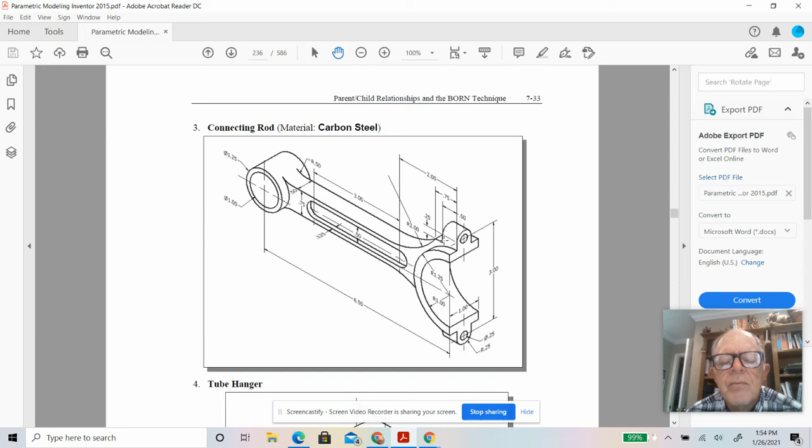So that's where I got the dimensions. It's all there. I want to show you the mirror command.

So once we have it done on the top here, we don't want to do all the work to get it in the bottom. It's easy, I'll show you how easy it is. You click mirror, it tells you what to do: select the mirror line. So the very first line I drew on this was this line right here.

Then I offset it up 3/8 of an inch, and offset it down 3/8 of an inch. Then I turned it into a construction line with that. I don't want that part of my extrusion, but I'm going to use it. Okay, so select a mirror line - that's my mirror line.

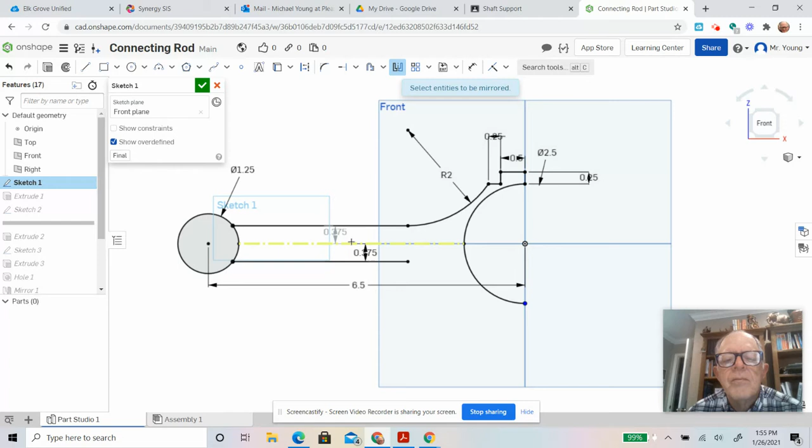Now select entities to be mirrored. I can click that one. Boom, look how easy that is. Boom, boom, sound effects are mandatory. Boom, boom, bingo, got a region. That beats putting all this stuff in again.

Now, the way I got this curve, it tells us what the radius is. I drew a 4-inch circle out here, made it tangent, made it coincident at that point, and then trimmed it.

All right, so we've had this problem before down here. I forget what that radius is - it's a 1/2 inch. So that's a fillet.

And we click here, and we click here, and it does not like that. You have to, first of all, trim this. No, that's the wrong one. Control Z, trim this. But I gotta go back to this - trim.

Now I can fillet it. Of course, if you did this first, you could have gone ahead and mirrored the fillet as well. The radius was - did I say 0.5?

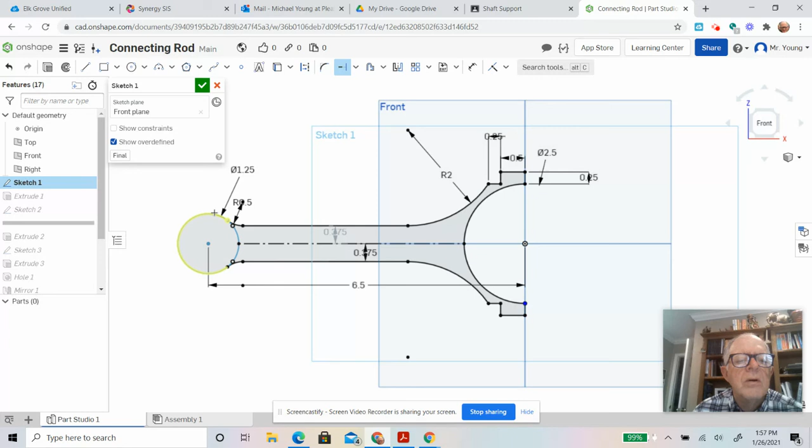So I'm going to extend this circle. Grab that circle and just bring it around here. So I put it back in. Now I can trim the back half of this, and that's what it's supposed to look like.

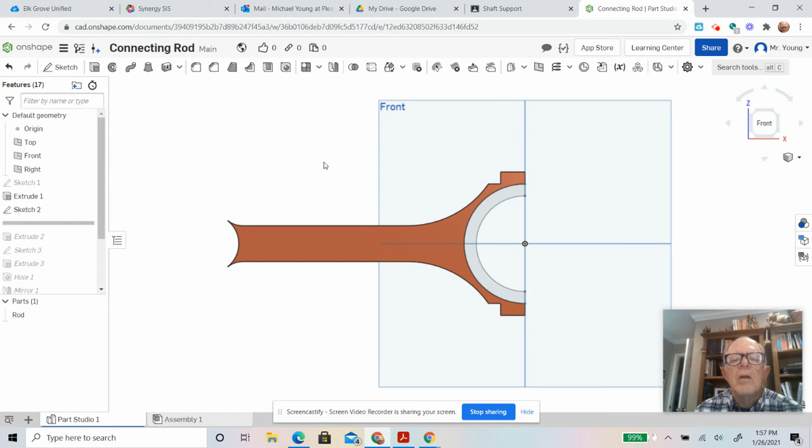Then I extrude it. Then I made that sketch, extruded that. Okay, now I put the little top on there. Then I put a hole in there.

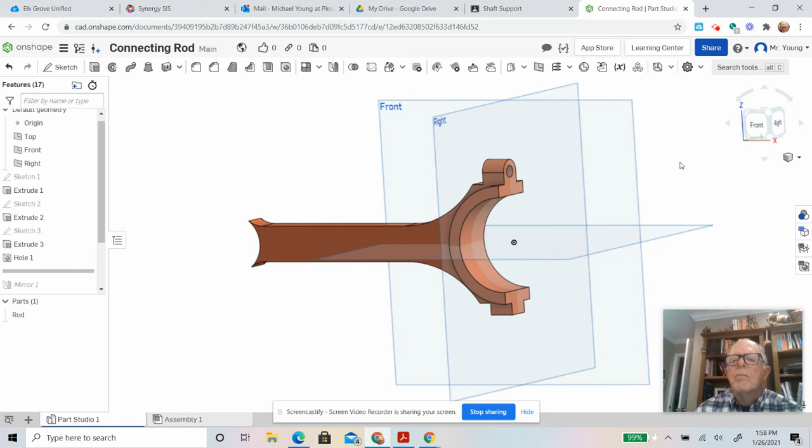Now I want the same thing down here. But that's a 3D mirror, and click here.

And I was having real trouble with this until I realized that this whole thing is a part - it wouldn't let me pick individual pieces of this. You've got to pull this down; we want to mirror features. Everything in here, this extrude is a feature, that's a feature, that's a feature. The hole is a feature.

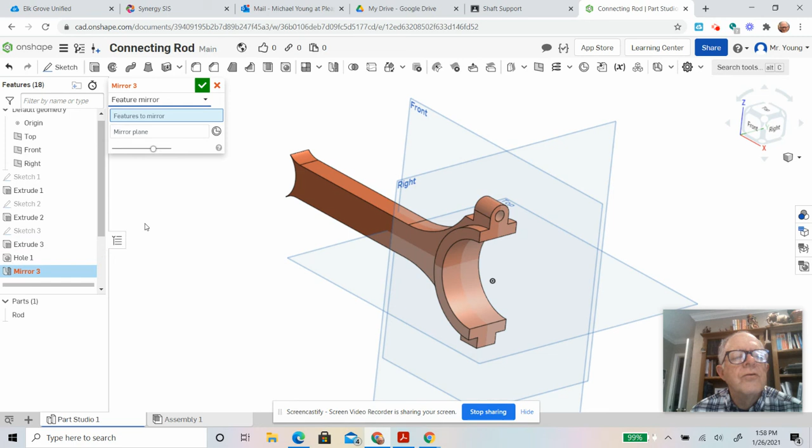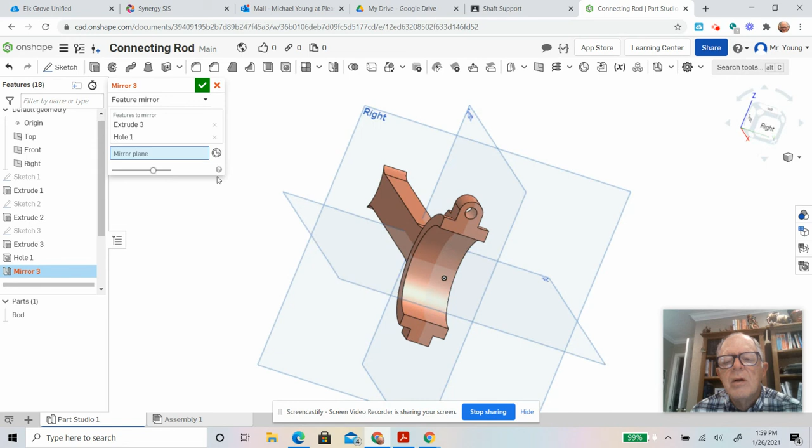So I can pick the features off of this - I want this extrusion, and I want this hole. I pick the mirror plane, and the mirror plane is the one right in the middle, right there. It's the top plane. So again, another key reason for keeping things centered. There it is.

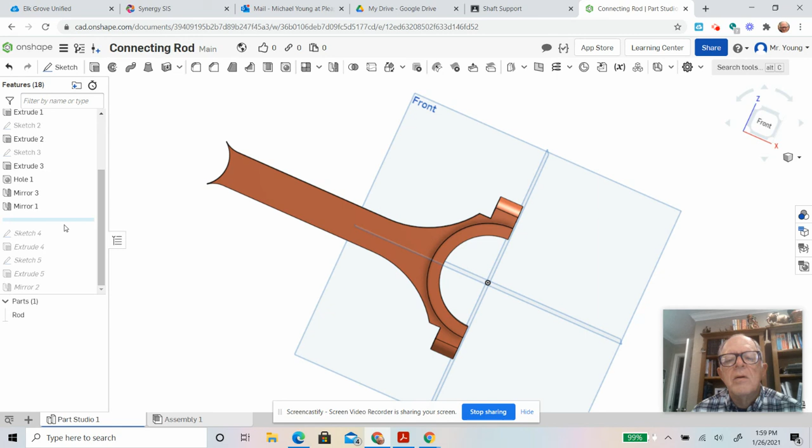What's that? I think that's something I don't need anymore. Okay, so then I put that on.

That's pretty easy. Now, when I did this, it didn't match up with this - it was because I had a radius wrong. I had to go back in and fix it. It should match. The distance says 6.5.

Okay, now I want to get rid of that. So that's really not too difficult - we know how to draw that, and we know how to extrude it.

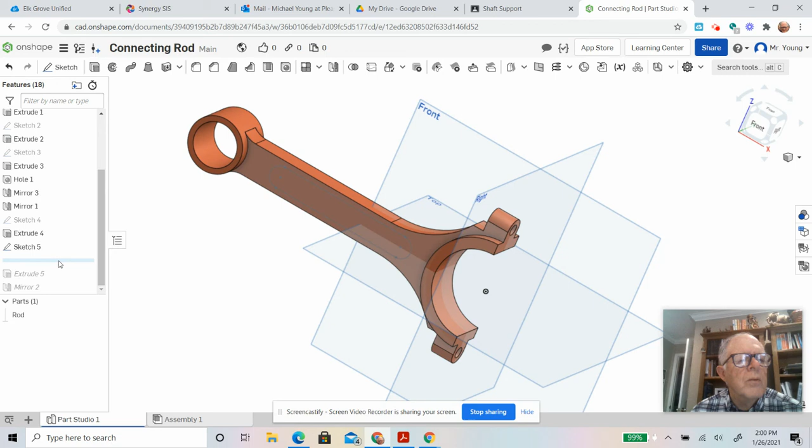But we want the same thing on the back side. So again, the front plane is right in the middle of this thing. That's the beauty of choosing the origin and getting things lined up from the beginning.

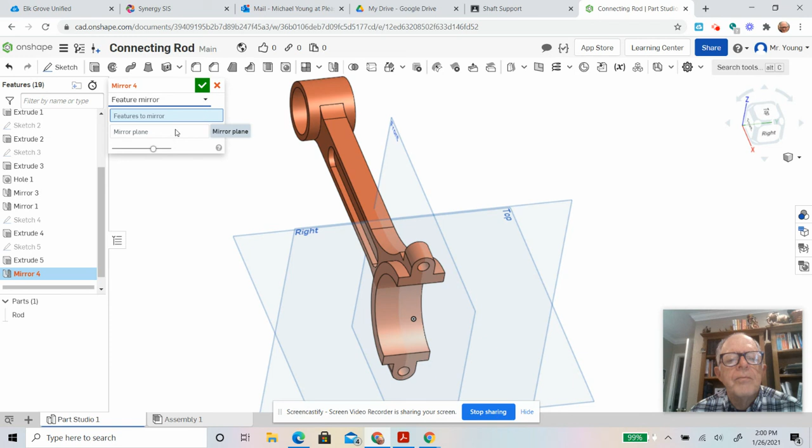So I can go mirror, pick the feature, and the feature I want is this extrusion. And the plane I want is this plane. Life is good.